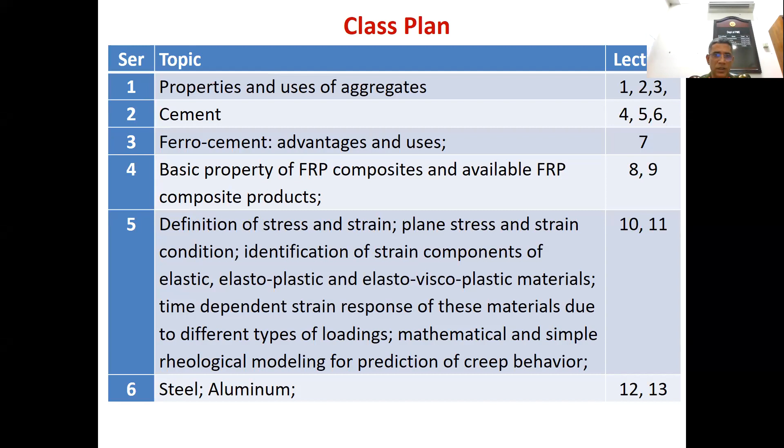Nothing extraordinary. Normally, in case of reinforcement, very thin reinforcement bars and cement are used, but the materials are not different—the construction procedure is different. There are some structures which are made of ferrocement, so we'll have one lecture dedicated for that.

Then, a commonly used material nowadays is FRP, that means fiber reinforced polymer or fiber reinforced plastics. FRP can be mixed with other commonly used materials, or it can be used independently. So we'll have 2 lectures on this topic.

Topic 5, lectures 10 and 11, is related to the properties of material, mainly steel—meaning mild steel, the reinforcement bar or rod that we commonly know. We'll be learning properties like strain conditions, elastic behavior, elastoplastic behavior, how they behave, and also creep response, stress relaxation, these types of terms. We'll have 2 lectures on topic 5.

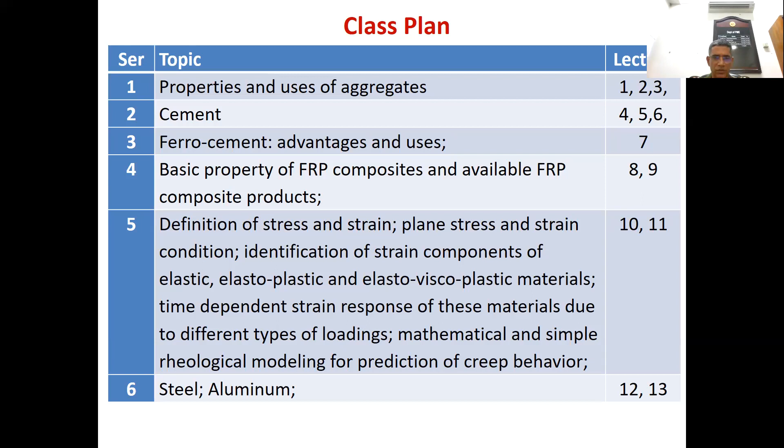Then we'll have 2 lectures for steel and aluminum. Aluminum we don't use much, but we should have some idea, and steel we should be thorough in.

Then one important issue is corrosion. In corrosion, I have 2 lectures: the corrosion and prevention of steel in reinforced concrete structures. This is a burning issue because the reinforced concrete structures we see nowadays, most of the buildings were made 70 to 80 years ago. At that time, people could not predict how the reinforcement rod would interact with concrete and how it would deteriorate over the period of time.

At that time it was not understood, but after use, nowadays people try to understand its behavior, because old buildings over the period of time, due to corrosion, are being deteriorated. And there are some offshore structures—structures built near the shore or away from the shore. So how to prevent it, what is the corrosion mechanism, how to prevent that—we'll have 2 lectures on that.

Then one of the new materials, the technology, is nanotechnology, and how we use this nanotechnology in cement and concrete.

We'll have 1 lecture on that. And then nowadays you'll be hearing one term related to engineering material that is called green building or green materials. We'll have 1 lecture for that.

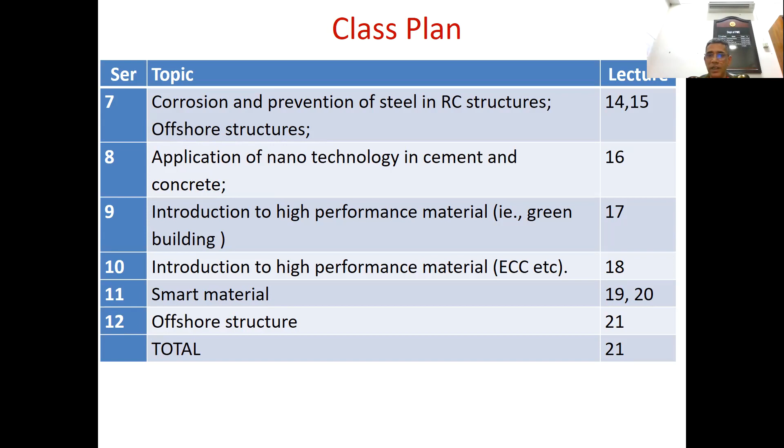And on the part of Lieutenant Colonel Faruque, he'll be covering brick, sand, lime, mortars, concrete. So I hope that by the time he starts with concrete, we'll try to finish at least the aggregate part and cement part, so that with that basic knowledge, once he starts concrete, you will have some idea. And this is the part, these are the issues which we'll be covering in this part.

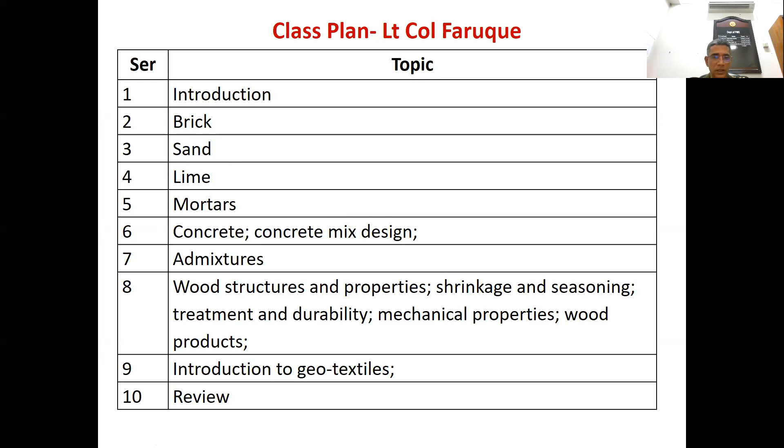Rationale of the course. So let us define engineering materials. Any material which has got application in engineering construction is termed as an engineering material. This is in the book of Dr. M. A. Aziz, first 3 or 4 pages.

Here he outlined why we should learn engineering materials. Those things are described in the book of Dr. M. A. Aziz, because over the passage of time, the requirement of engineering materials for engineering applications is becoming complex day by day. The concept of using engineering materials before 5 decades, before 3 decades, and now are different, because there is always an effort to increase the efficiency of commonly used materials, and also to invent new materials.

So what we want, our expectation from engineering materials, is that they should have enough strength, they should be safe, they should be environment friendly, and they should be cheap. And if the strength is more, they will occupy less space. So things are getting complicated day by day and challenging.

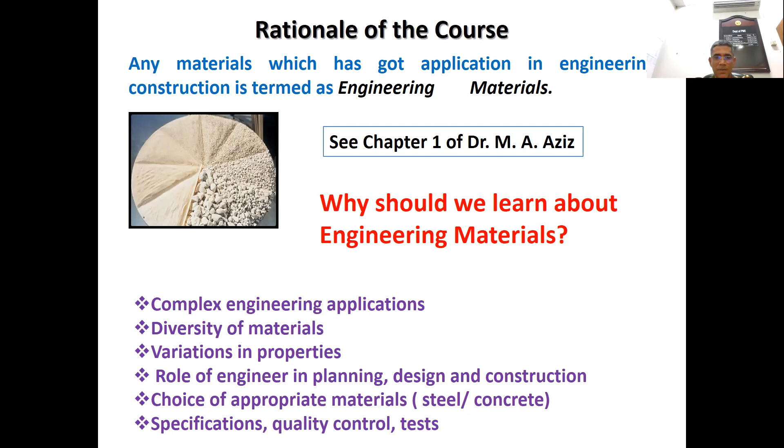In the specifications, the requirements or desired properties of materials are mentioned. This means when you use some material, you have to maintain its quality. How to maintain the quality? The quality of the material will be ensured through different types of tests. Some tests are conducted in the laboratory before use, and some are conducted once the construction is made. In your sessional in solid mechanics lab and material concrete lab, you will have some idea about these types of tests. As an engineer, you should have idea about these issues.

In each case, the satisfactory operation of the building as a whole, or any structure, depends on the performance of the materials from which its components are made, as well as on how they interact with each other in the building. For example, in a building you have concrete, cement, and reinforcement bar, some of which are precast and some cast in situ.

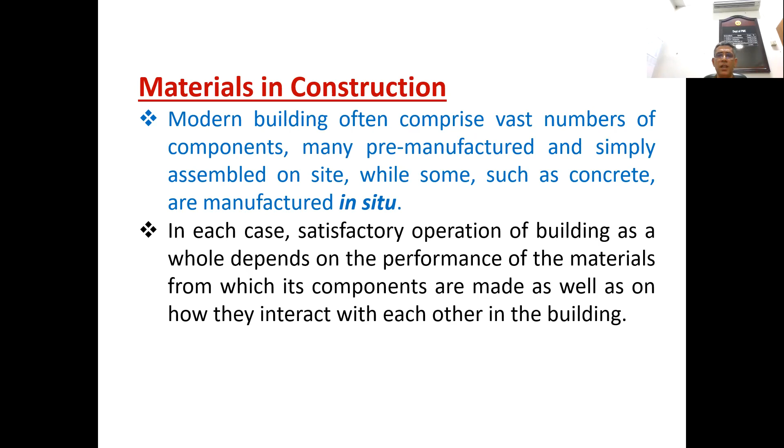In a building, during construction, after construction, and for the service life of the building, how this thing will behave, that we need to understand. This is a question, an important question for the exam also.

Requirements might include: before assessing the suitability of any one material for a given situation, the performance requirements for that situation must be identified. So the question is, if you choose any material, what are the performance requirements the material must fulfill?

First comes safety, the ability to withstand stresses which will come from gravity, that is the weight of the material itself, then from wind, and then from thermal expansion, moisture movement, or other sources. So structural safety is very important.

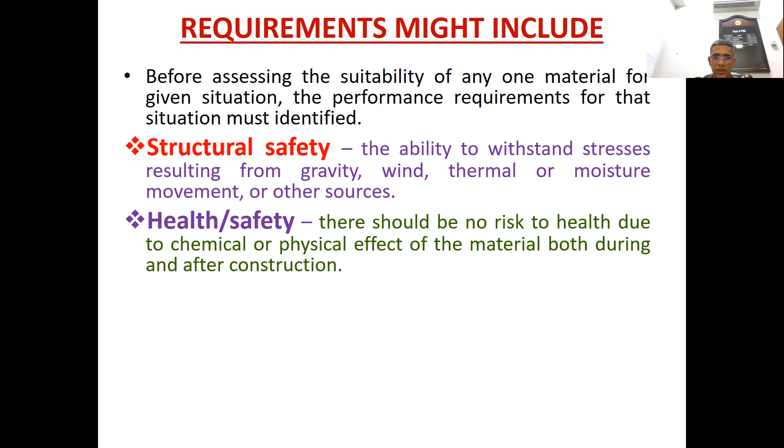Then comes the safety of occupants, health safety. There should not be any risk to health due to chemical or physical effect of the material, both during and after construction. In our country, before maybe two decades ago, there were still some structures with roofs made of asbestos. Later it was found that asbestos is not good for health, because in the long term it causes cancer. Nowadays we don't use asbestos as a roof material. So whatever materials you use, you should consider the safety of occupants or users.

So one is structural safety, one is the safety or health of users. Fire is another hazard. The material you are choosing must be in an acceptable range of resisting the spread of fire or the release of dangerous substances in fire, and must retain satisfactory structural stability.

For example, if a house is made of wood, if fire occurs, it will spread very quickly. If it is made of concrete, concrete can prevent the spread of fire for a certain time. Then there are some materials, for example in some buildings, some part is made of plastic, meaning during burning in a fire it will release dangerous substances which will cause problems for breathing or other issues.

When there is a fire, once it is over, you will have an assessment of the building to see whether it is retaining its structural stability or not. For example, a few months back you may have seen in the newspaper that in Banani area there was a building that was subjected to fire.

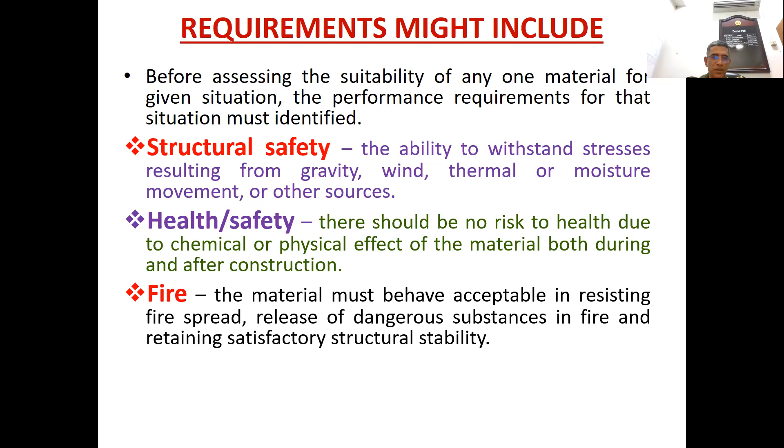After a fire, the structural stability of the building needs to be assessed. MIST, as part of consultancy, is doing that damage assessment and is given the responsibility to assess whether the building is still suitable or if something can be done so it can be used. So the materials you use must be able to resist or address all these fire-related issues.

Durability is very important. The material should fulfill the above performance - structural safety, health safety, and fire resistance capability to some extent - and that makes the material durable. If the material is durable, the structure will also be durable. Each structure has a lifetime; for a building we say 50 years is the design life, and for a bridge maybe 75 or 100 years.

If a bridge is made of concrete, over 100 years there will be deterioration of the concrete. For a steel structure, after a few years if not maintained properly, its condition will deteriorate. Some parts may be underwater, and when material comes into contact with water, or if the structure is in a marine environment, corrosion is more in marine environments.

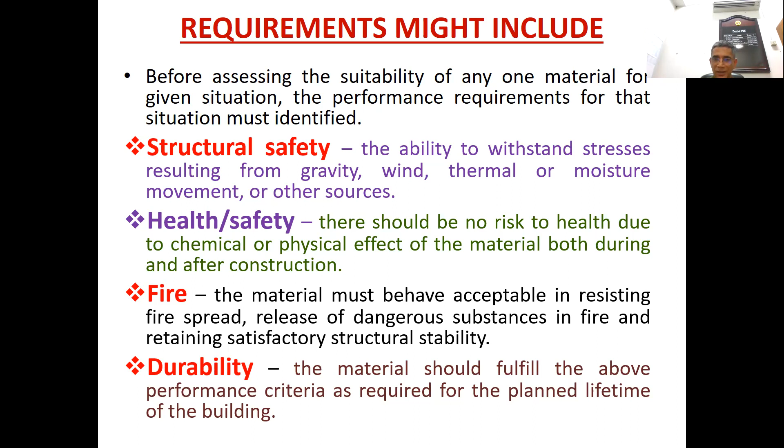Why is corrosion more in marine environment? Because the marine environment is saline. So here comes the term durability - whatever structure you make, made of some materials, you have to consider the durability aspect of the material.

In addition, one important factor is cost or availability of materials. For example, in road construction, nowadays we don't use brick chips because of low strength properties - we use stone chips. The main sources of stone are from the Sylhet area, from Bholaganj across the border, and some stones come from neighboring countries which we crush after collecting. Another source is Dinajpur, in Madhyapara, where there is a granite mine with very good quality stone.

So availability of material matters. If you don't have enough stone, you may have to import stones from abroad, which will significantly increase the cost of the project.

Then there's the ease with which the material can be incorporated into buildability. For a building, besides concrete, there's material for plumbing, electricity, doors made of tile or wood, and other fixtures. For example, the facade - the exterior of the building - in skyscrapers or high-rise buildings today is often made entirely of glass. So how easily this material can be incorporated into buildability also needs to be considered.

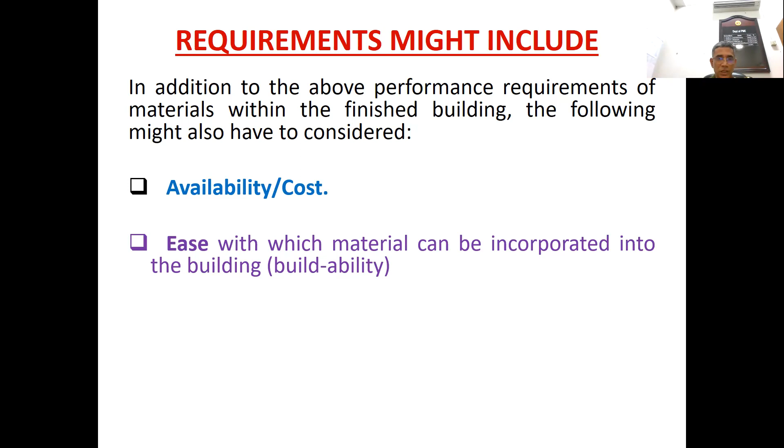Then the environmental aspect - very important. For example, the energy demand of the material during manufacture and its ability to conserve energy in use. This topic will be covered in green building lectures, we have a dedicated lecture for that. For now, know that the total energy is constant, and materials like stone, sand, and cement - whose raw material is limestone - these are not infinite, so they are non-renewable.

So here comes the point that whatever structure you make should be energy efficient - meaning you have to choose materials that will sustain for a longer period, and the manufacturing process should also be good, meaning environment friendly. Once you complete a building, over its 50-year lifespan, you should understand whether the materials used have a bad impact on the environment or not.

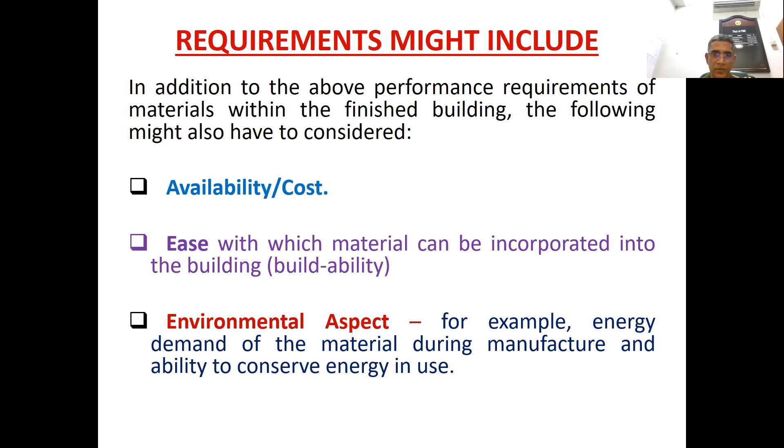Here I'll cite one example of a few iconic engineering structures: the world famous Taj Mahal in India, Great Wall of China, Twin Tower of Malaysia, Burj Al Khalifa of Dubai. These are unique examples of civil engineering creations, and there are more in China.

In case of civil engineering constructions, China is now the lead country. They have so much innovation in making structures. China, and especially nowadays Asia - China, Hong Kong, and Taipei - these are the countries making tall structures, and research work and innovative ideas are coming up from these regions.

Even in case of Burj Al Khalifa, the lead was Samsung, South Korea. Then there were workers from India, some part was made by expert engineers from Hong Kong, and maybe the main engineer was from USA. So it is a multinational professional group.

We'll be talking about Burj Al Khalifa later. You can see the Twin Tower of Malaysia, and the Taj Mahal, constructed maybe 400 or 500 years before.

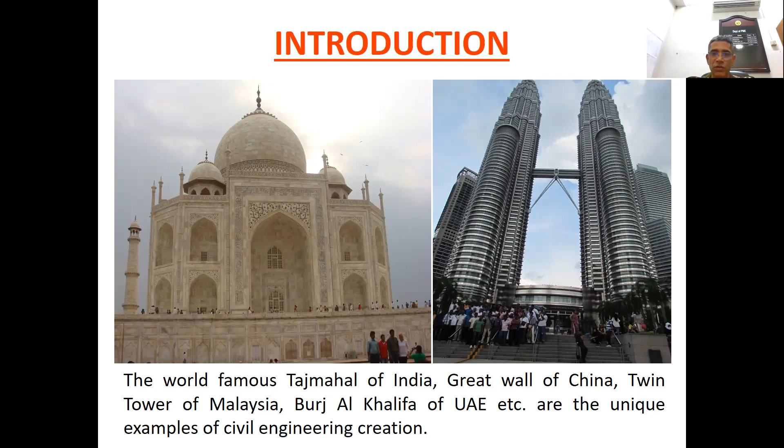The materials used in this building basically include reinforced concrete as the main material, then glass, steel, and aluminum. These are the materials used in this building. There are 154 usable floors plus 9 maintenance levels, meaning 9 levels are used exclusively for maintenance purposes.

In case of elevators - so when you're talking about the building, in your building you will be requiring lifts and elevators. In this building there are 55 single deck lifts and 2 double deck lifts. What is a double deck lift? The lift you usually see in our country or in MIST is a single deck lift. Double deck lift means 2 lifts will come together - one will stop at an odd floor and one will stop at an even floor, so 2 lifts come up together and go down together.

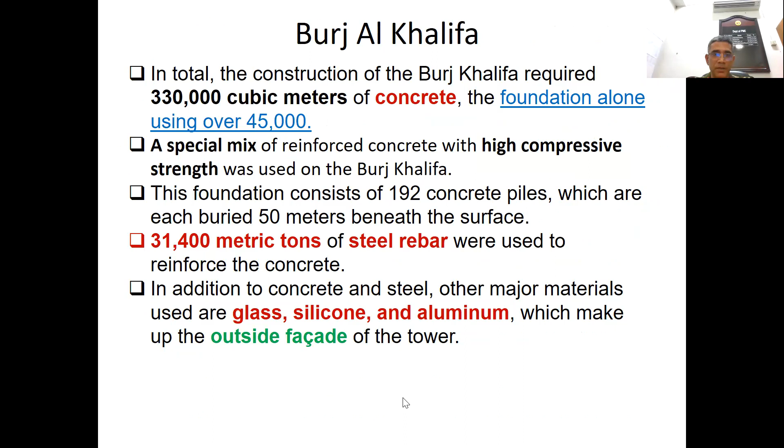That's why it is called a buttressed core system, and this system went up to level 156. Above level 156, it has a structural steel braced frame, which gives an additional height of approximately 230 meters tall structural spire.

The concrete strength of the tower columns and walls ranges from C80 to C60. C80 to C60 implies the strength of the concrete. Here they have used high strength concrete.

The strength of the cube was between 60 to 100 Newton per millimeter square, and the main application of high strength concrete is in situ concrete constructions. Normally high strength concrete is used for offshore structures, for the columns of tall buildings, for long span bridges, and other highway structures. Those high strength concretes were used in Burj Khalifa.

The main advantage of this high strength concrete is that if the strength of the concrete is more, then the reduction in the size of the compression element happens, and also the amount of longitudinal reinforcement required is lessened.

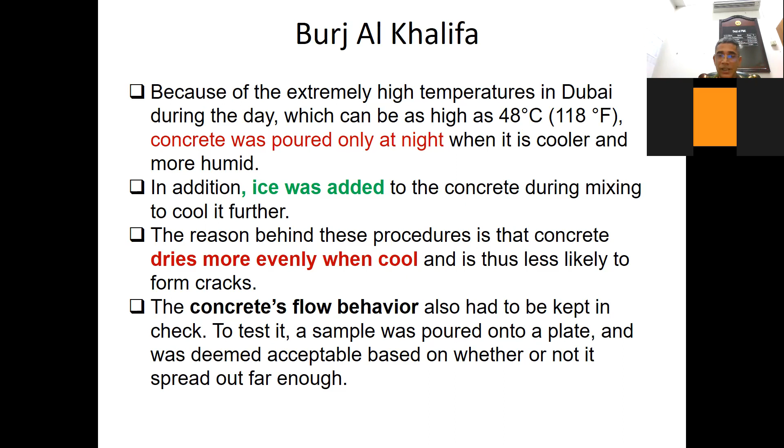The reason for pouring concrete at night, or using ice, is that concrete dries more evenly when cool and is less likely to crack. If done in high temperature, you get those bad effects. They also had to keep in mind the concrete's flow behavior, so to test it, a sample was poured onto a plate to see whether the concrete could flow easily or not.

The concrete was pumped from the ground to a height of 601 meters, breaking the previous pumping record held by a skyscraper in Taipei, Taiwan.

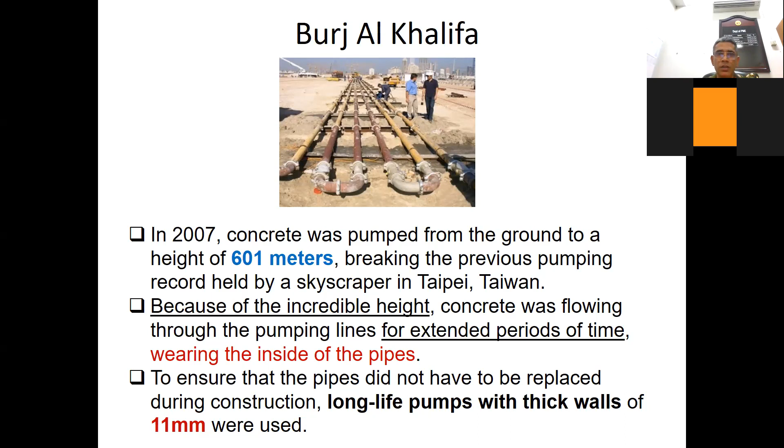So those are the challenges in Dubai: temperature difference is one, and the soil itself is not good. Even after a few meters, 1 or 2 meters, they found very weak soil - limestone or very weak soil - and they had to take precaution for that also while considering the foundation part.

Sir, I have one question. Sir, normally the standard period for curing is 7 days - curing of the concrete. Sir, now in SCC, is there any difference?

In case of plain concrete, then in case of RCC, there are various limits - 7 days. Then if it's your roof slab, 28 days curing. So between 21 days and 28 days, there are various curing times of concrete. So you can reduce that curing time - at that time you don't use the conventional concrete.

When we talk about the cement lecture, we'll see that there are various types of cement. Concrete curing depends on the curing of the cement - how much the cement cures determines how the concrete curing happens. There are various types of cement, some of which can cure very quickly. Normal conventional concrete takes 28 days for curing, but some special type of cement can attain that curing within 3 days if you change the properties of the cement.

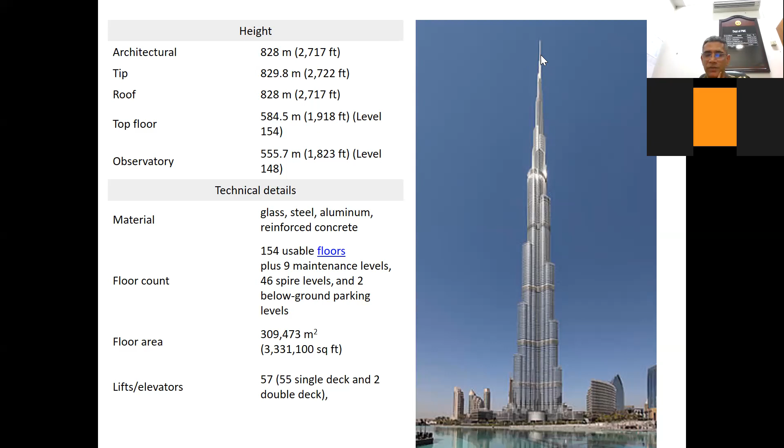I saw on Discovery and some other channels how this maintenance work is done - most probably some Indian guys, responsible, most probably from Tamil Nadu, I forget exactly. They are dedicated to this. It's done, and it's a very dangerous affair maintaining the spire part - the steel structure, the upper part - and you have to maintain those facades. Continuous maintenance is required.

So you have got a structure, you take pride that you have the tallest structure in the world, but you see, there are subsequent maintenance issues that come with it.

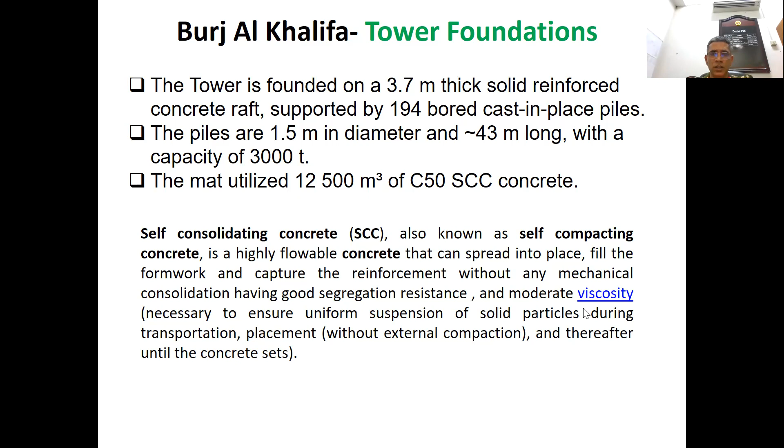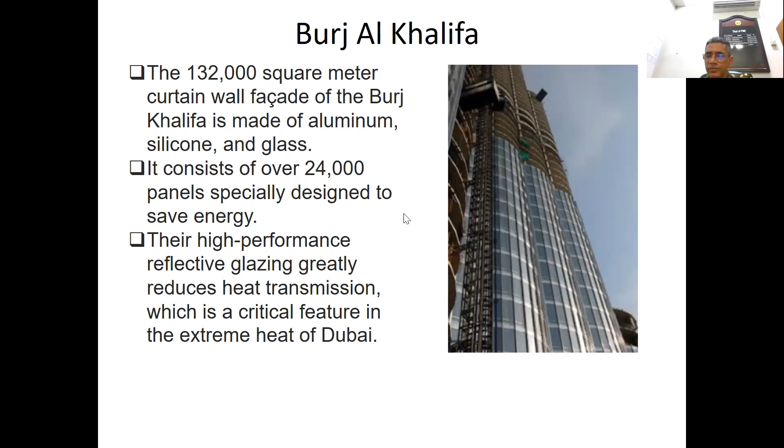We are talking about the material part. Sir, tell us - sir, we have a class at 12:45, sir. Okay, alright. So that's all.

So this is the initial lecture. We learned about material in general, the rationale of the course, and discussed Burj Khalifa in general. From next class onward, we'll concentrate on the constituents of concrete, that means the aggregate part - we'll be considering the aggregate part.